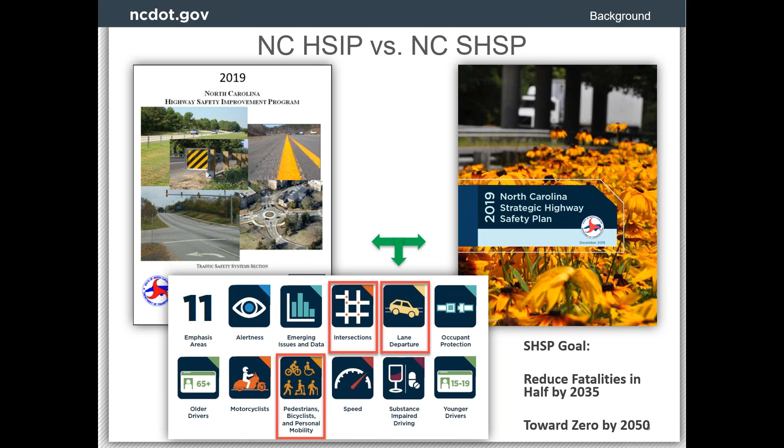In North Carolina, we have 11 emphasis areas with a big focus of the HSIP falling on lane departure, pedestrian safety, and intersections. In 2019, over 30% of fatal crashes in North Carolina were frontal impact crashes, and 2/3 of those occurred in rural areas. When I use the term frontal impact, I'm including a few different crash types, which are predominantly angle and left turning crashes. In 2019, rural frontal impact crashes resulted in over 300 fatalities and 1,100 serious injuries.

These crashes are disproportionately severe. The stats show that about 10% of all rural frontal impact crashes result in serious injuries or fatalities. The statistics demonstrate that our rural intersections need to receive additional focus, and they need to be part of our program in a structured and focused way. We feel that all-way stop, when used strategically, can help move us to better meet our goals for reducing fatal and severe injury crashes in North Carolina.

NCDOT is in the process of treating candidate intersections that have potential to be good all-way stop locations. We are taking a targeted approach and selecting these sites through an all-way stop initiative. In the 2019 HSIP program, over 3,000 intersections were identified through our intersection warrants based on crash history. This includes a diverse group of locations and many sites that would not be considered for an all-way stop due to volumes and site characteristics.

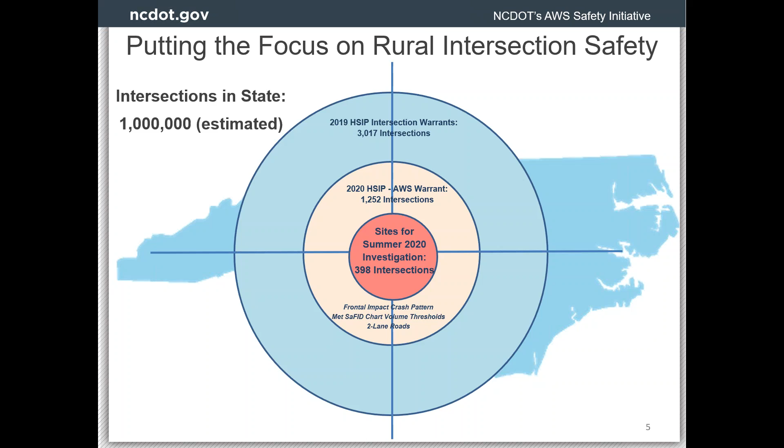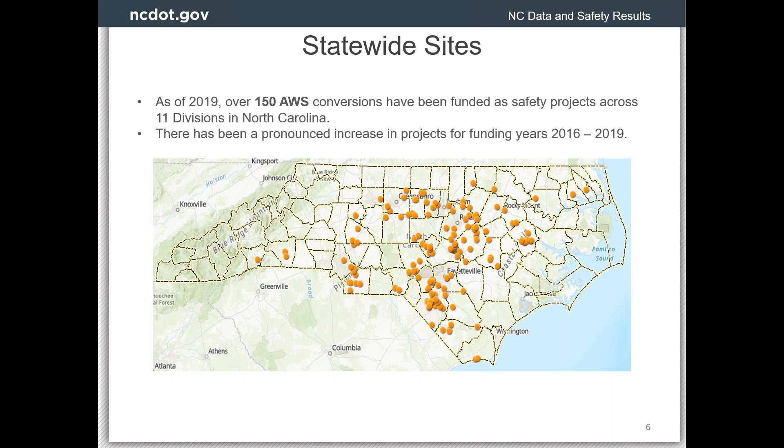This map depicts sites that have been funded as safety projects in North Carolina through 2019, prior to the current safety initiative. There had been over 150 all-way stop projects up to that point. With the ongoing all-way stop initiative and our safety programs, we expect this number to be doubled within the next few years.

10 years ago, we performed a safety study analyzing over 50 intersections in North Carolina converted from two-way stop to all-way stop. This research was authored by Dr. Hummer and me and was published in a research journal. The study included a diverse group of four-leg intersections in a mix of environments and with a range of volumes and approach speeds. The overall results indicated a roughly 70% reduction in total crashes, roughly 80% reduction in injury crashes, and a 75% reduction in frontal impact crashes. The higher speed sites saw an even greater crash reduction than the lower speed sites, which makes sense assuming greater reductions in speeds entering the intersection.

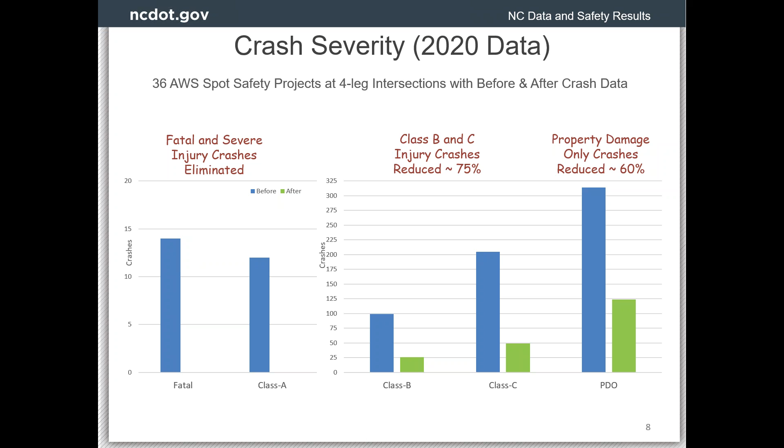Following up on this work, we used a current set of all-way stop projects to analyze the impacts on crash severity. We found fatal and severe injury crashes were eliminated after all-way stop was installed. We found a roughly 75% reduction in Class B and C injury crashes and a 60% reduction in property damage only crashes. This demonstrates the impact that all-way stop has on all severity of crashes, but that its truest strength is reducing the highest level of injuries.

Using the same set of all-way stop sites, we find a staggering 83-to-1 benefit cost ratio. This is due to the relatively low cost with median installation costs of roughly $20,000 per intersection and the previously mentioned elimination of fatal and severe injury crashes for these sites. In the roughly 100 all-way stop intersections I've studied through the 2010 paper and this more recent data set, I've never observed a fatal crash after the all-way stop was installed.

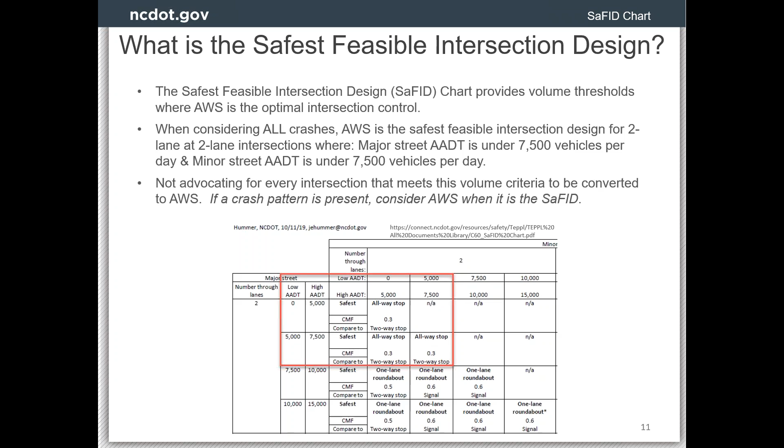Here are some numbers that Dr. Hummer produced to back that up. These are from the Highway Capacity Software and with some assumptions made of what we would expect to find in North Carolina. This is comparing two-way stop control to all-way stop control and provides the average delays in seconds per vehicle in the peak hour of the day.

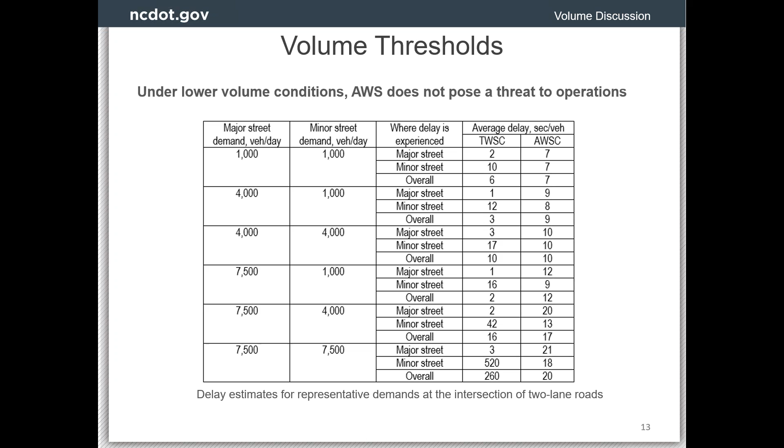If you look down the chart, you can see the pattern is that all-way stop adds a few seconds of delay to the major street on average, reduces delay on the minor street by a few seconds per vehicle on average, and overall the pattern is that all-way stop adds a few seconds per vehicle, but never that much additional delay. At the bottom, there's a case where two-way stop gets over capacity and now the all-way stop operates better. The safety benefits of all-way stop are so good that a few extra seconds of delay should not be enough to stop us from installing the countermeasure where it otherwise fits.

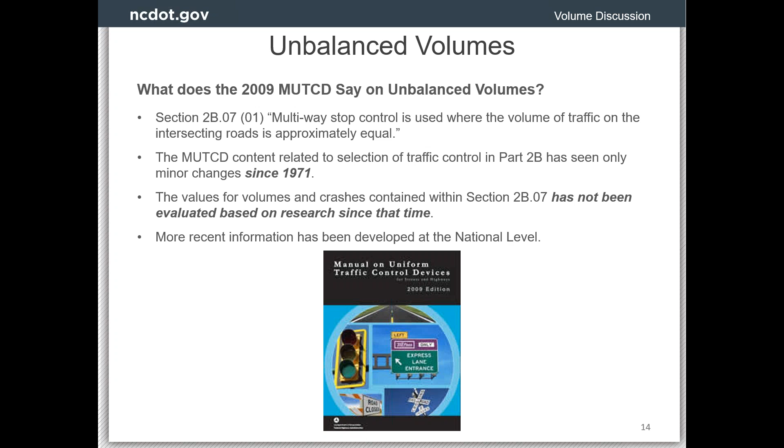I'm going to spend a little bit of time talking about unbalanced volumes and what data is available on the topic. The 2009 MUTCD states that multi-way stop control is used where the volume of traffic on the intersecting roads is approximately equal. The content in this section of the MUTCD has only seen minor changes since 1971. The information in this section is not based on research conducted since that time. We acknowledge the information provided in the current and past editions of the MUTCD in this section has been used for many years, but more recent information has been developed at the national level.

The more recent research is that of NCHRP 03-109, which created proposed MUTCD criteria for determining appropriate traffic control at unsignalized intersections. I served as a panel member on this research, which was completed in 2015. The criteria were developed to be considered for inclusion in the next version of the MUTCD, and the research results have been provided to the National Committee on Uniform Traffic Control Devices for their consideration.

In the all-way stop criteria that was developed, all language pertaining to unbalanced volumes was removed. One document that is referenced in the report is a study that showed all-way stop is no less effective when approach volumes are unbalanced as when they're equal on all approaches. This more current research from the NCHRP study will likely change what is provided in the next version of the MUTCD.

I'm going to share with you some information from North Carolina. We have over 140 all-way stop projects funded by Spot Safety with major and minor road AADT information. When we split the sites by volume share, we find that half of our sites have volumes that are approximately equal. The other half of sites have volumes that would be considered unbalanced. The most unbalanced site in this group had a volume share of 89/11, meaning the minor street volume accounted for 11% based on the AADTs.

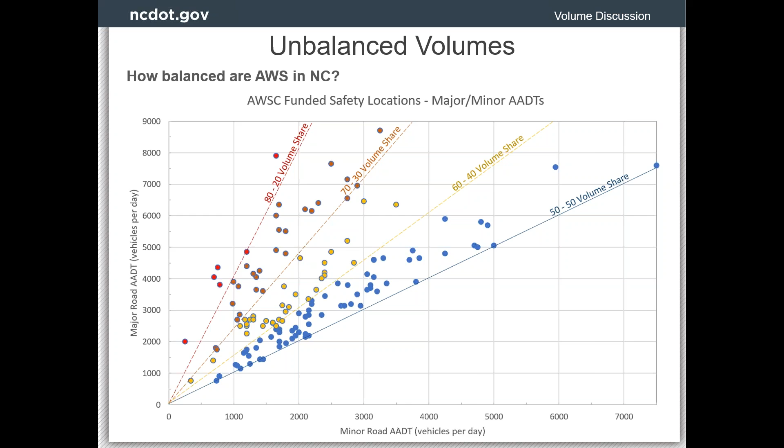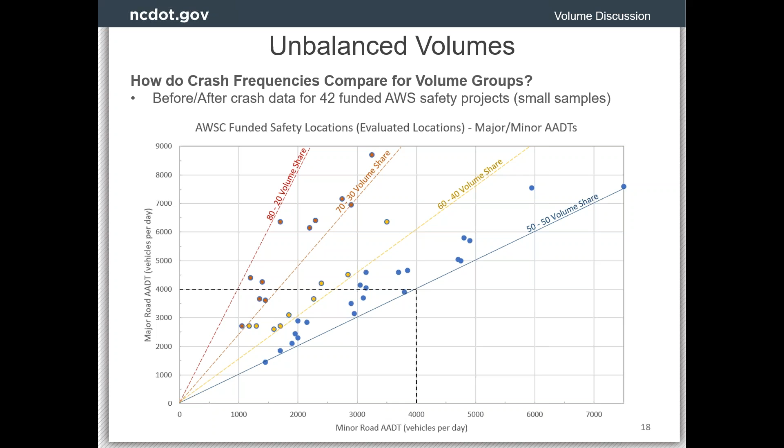This is a subset of sites that have both volume and before and after crash data available. We use this set of sites to compare crash frequencies for 6 different volume bins that break out the sites by the major road volume and volume share. It's a small sample to pull from, but we can extract some helpful information from it.

The next slides I will present briefly cover a few other items we have frequently received questions on related to all-way stop. Presence of trucks should not be a reason to exclude all-way stop as a safety treatment. Locations with a high truck percentage may need a closer inspection. However, all-way stop does not appear to pose a problem for trucks based on crash data.

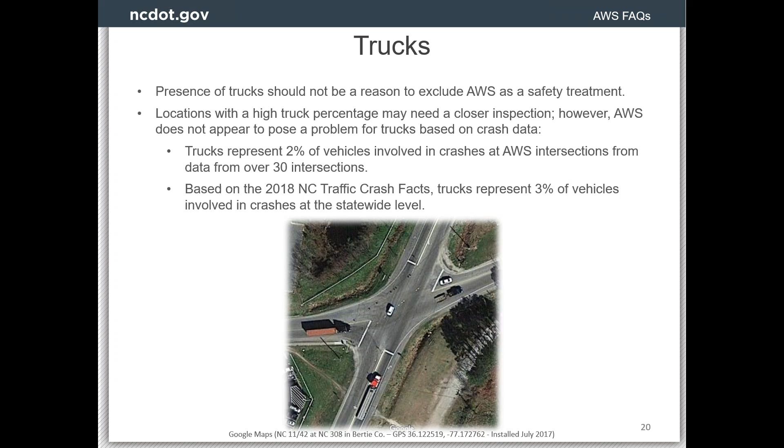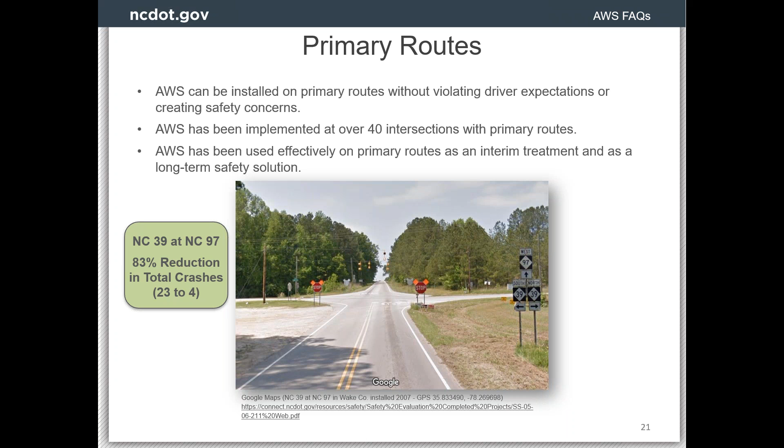All-way stop can be installed on primary routes without violating driver expectations or creating safety concerns. It has been installed at over 40 intersections with primary routes through the Spot Safety Program. This example intersection, which was installed in 2007, showed an 83% reduction in crashes.

As an interim measure, all-way stop can be installed quickly and can control traffic while arrangements are made for a long-term traffic control. This would be where roundabout, mini roundabout, or traffic signal are justified based on intersection volume, but where there's an immediate safety need that can be addressed by the all-way stop.

An example at left, crashes per year were reduced by about 50% when the two-way stop was converted to all-way stop. We also have many locations installed for a long duration of time that are still doing well, with roughly 40 locations installed 5 or more years ago that are still in place. On the right is an example that was installed in 2011 and which saw a 79% reduction in crashes.

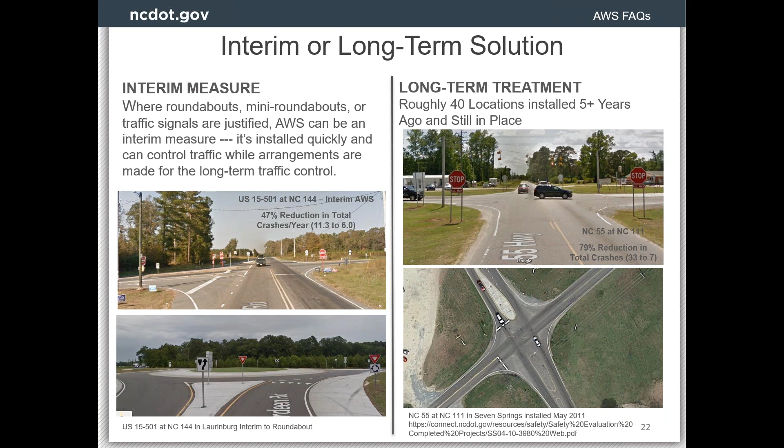The safety of all-way stop at 4-leg intersections is well demonstrated. There's likely great potential for 3-leg intersections. However, limited safety data is currently available. This example 3-leg intersection saw a 69% reduction in crashes when all-way stop was installed.

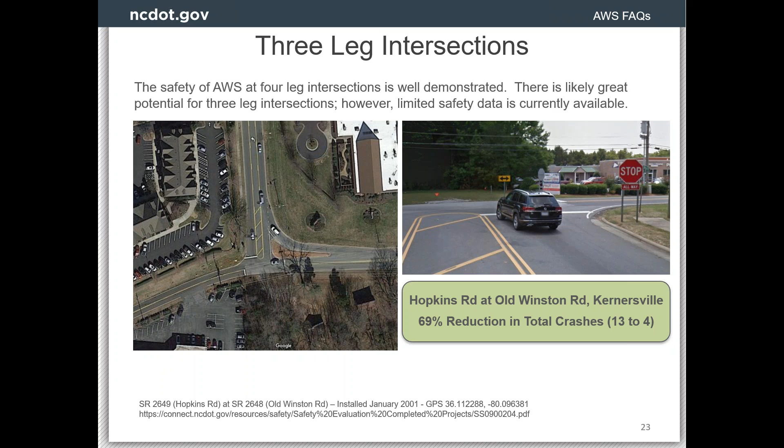The HSIP initiative is focusing mostly on rural intersections. However, I would be remiss if I did not at least briefly touch on pedestrian considerations. In urban locations, the impacts of pedestrians on all-way stop operation need to be considered. Additional study may be needed if pedestrian volumes are high. In locations with heavy pedestrian volumes, there may be conflicts between pedestrians and motor vehicles, and operations may degrade.

However, all-way stop may be a safer option than some other forms of traffic control. More data and research is needed in this area. I found a news article out of Asheville where all-way stop was installed at an urban intersection a few years back as a pedestrian enhancement to make a crossing safer.

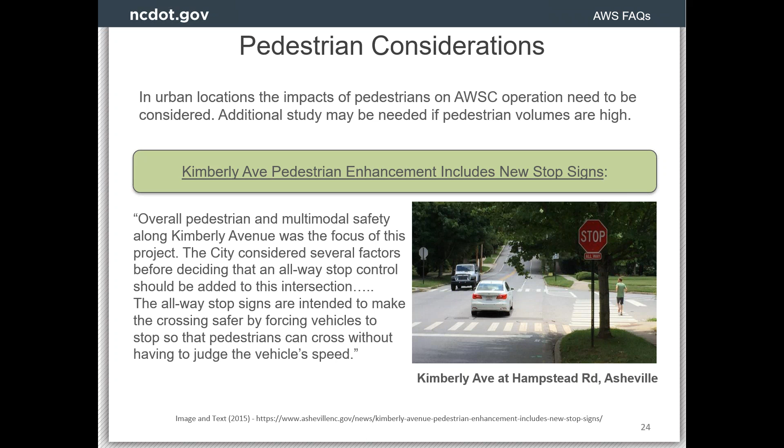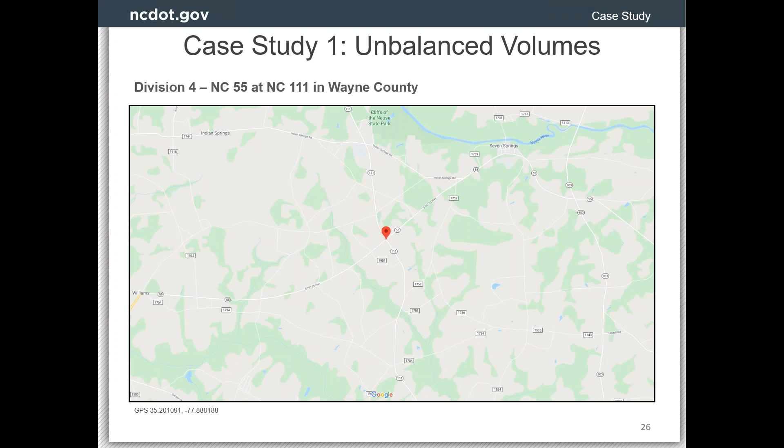Thank you, Carrie. And I have 2 case studies to go over today. Case study number 1 is NC 55 at NC 111. This is a rural intersection in Wayne County. This intersection is located south of Seven Springs, North Carolina, and just south of the Cliffs of the Neuse State Park.

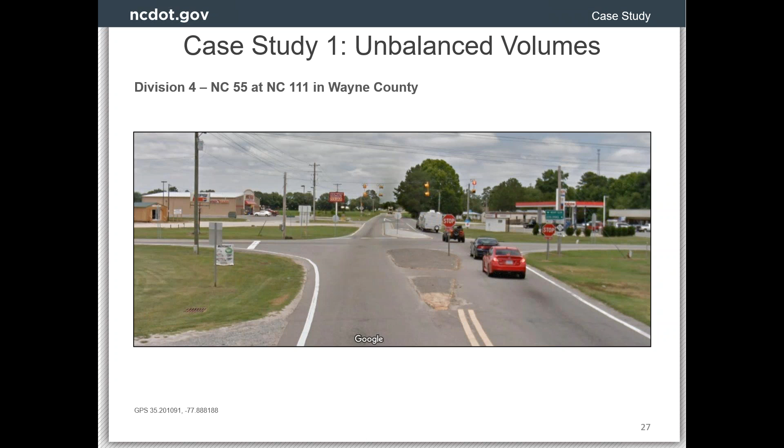This is looking north on NC 111 under current conditions as an all-way stop controlled intersection. There's a good amount of commercial development here, including a gas station, a Family Dollar store, a car lot, and a restaurant. Average daily traffic on NC 55 is 55% of the volume of NC 111 at this location. There's a high percentage of truck traffic. It's interesting to note that when this was under two-way stop control, the stop condition was on NC 111, which is the higher volume road.

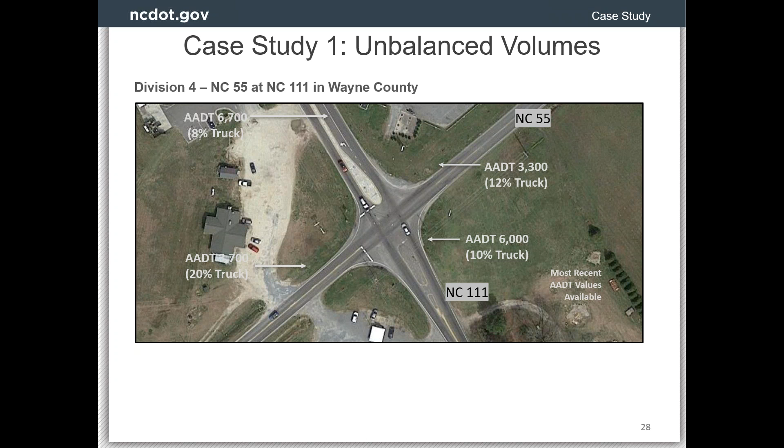This intersection was originally identified by the 2010 Highway Safety Improvement Program. A spot safety project to convert it to all-way stop control was developed and submitted in May of 2010. Modifications included changing the lenses of the existing overhead flasher to red on all approaches, installing dual stop-ahead warning flashers on both approaches of NC 55, supplementing the existing shoulder-mounted stop-ahead warning flashers on NC 111 with identical assemblies on the left shoulder, and widening the shoulders at the intersection.

So the spot safety project was funded and the all-way stop conversion was completed in May 2011. Here's the before and after data representing 3.92 years in both time periods. The installation of the all-way stop resulted in a total crash reduction from 33 to 7 crashes. Total severity was reduced by 69%, and frontal impact crashes were reduced from 31 to 3. Traffic volumes increased by 25% during the study period to over 9,000 total entering vehicles.

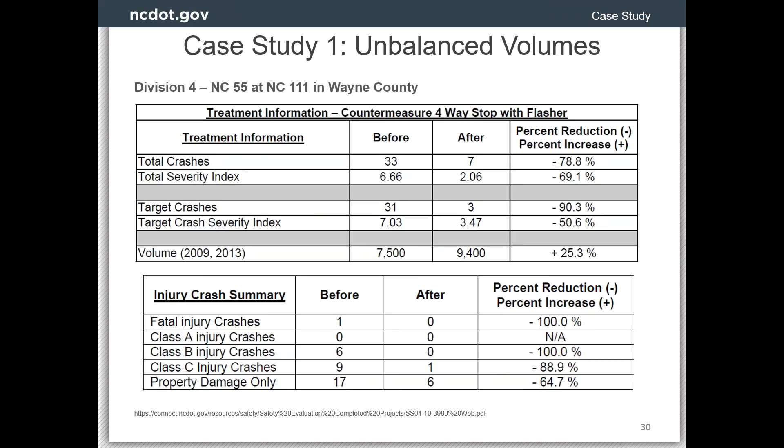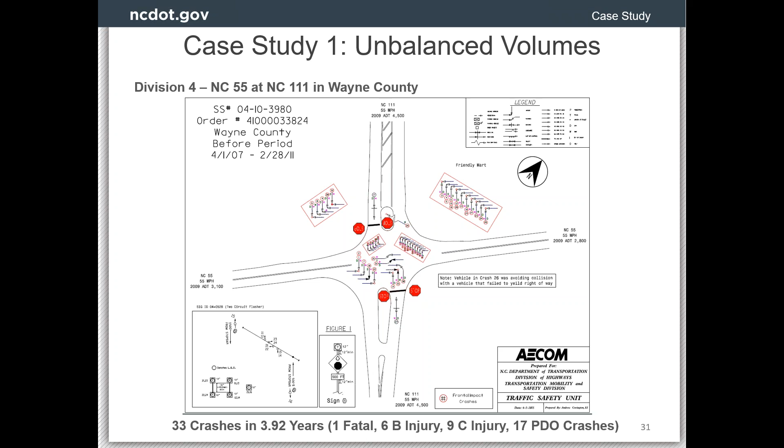And here's the before period collision diagram showing the pattern of angle crashes. The HSIP investigation notes indicate that the primary issue with the angle crashes was failure to yield after stopping. And then here's the after period collision diagram showing this significant reduction in crashes.

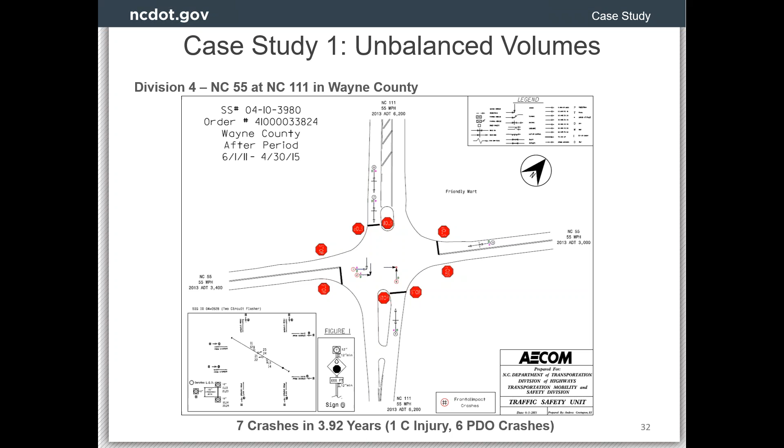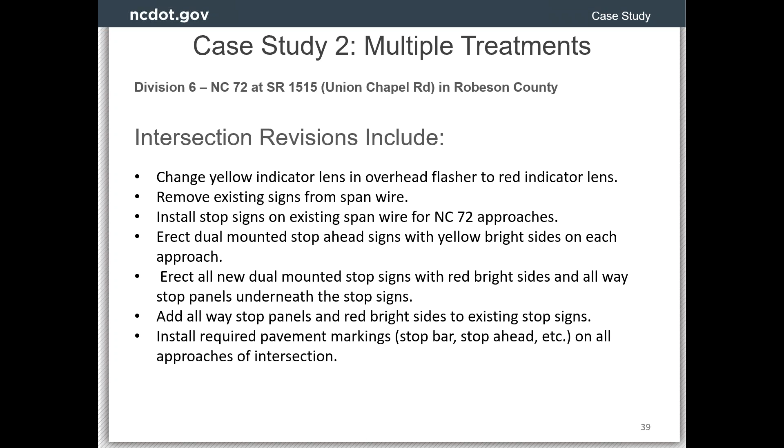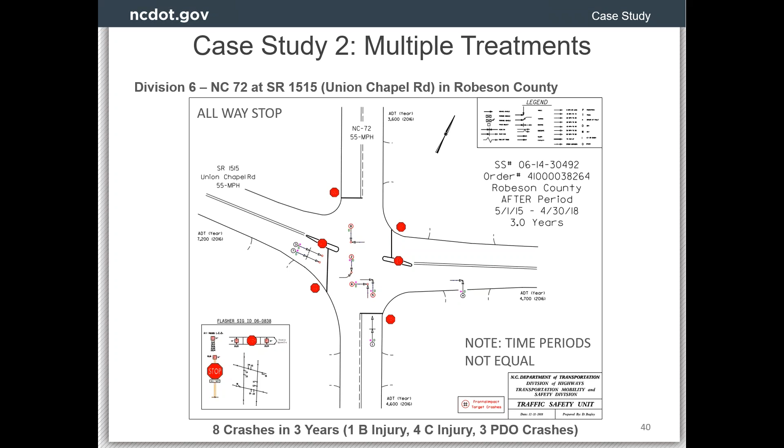And so as a result of the continuing crash pattern, an additional safety project was developed to convert the intersection to all-way stop control, shown here. And that project was completed in March of 2015. So that project converted the overhead flasher to display red on all approaches, added stop signs, stop ahead signs, and new pavement markings. And so here is the crash data for 3 years after the all-way stop conversion. There were 8 total crashes, including 5 injury collisions. And note that there is a difference here in the time period on this slide from the previous slides.

So if we compare the per year crash experience between the two-way stop control, the two-way stop control with actuated flasher, and the all-way stop control, there was only a minor improvement as a result of the flasher project. Comparing the before data to the all-way stop data reveals significantly better safety performance with a reduction in total crashes, severity, and target crashes per year. And one final note on this location, there was concern expressed by the local community regarding the expected operational performance of the all-way stop. Following conversion, the intersection operated very well with only minor queuing of 2 to 3 cars at a time during school hours.

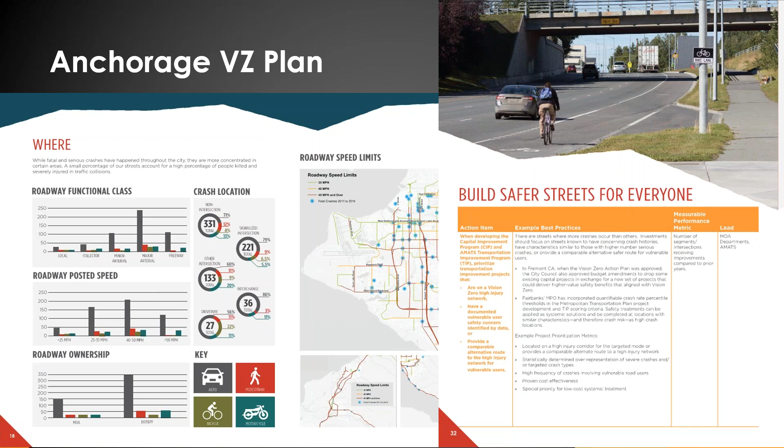So this was a summary we presented last year on the actions of Vision Zero in the first year of implementation. So we created the plan and the action plan, and then it was actually the state health department that secured a CDC grant for 5 years of implementation. Otherwise, it might have sat on the shelf, and I'll get into that a little bit later. So in subsequent years, we've done an annual report and really tried to work on agency buy-in. We had a roadshow presentation to wide audiences, committees and boards throughout the municipality.

We conducted a crossing study on a key arterial and are looking to set a systemic approach there. We did a transit survey for mode choice, as well as a demonstration project, and a couple more next year. However, I can say, this looks good. We pulled together a nice infographic, but Vision Zero is really yet to take hold for Anchorage.

Even in the agencies, there's the usual city versus DOT conflict of priorities, as well as we haven't even had a chance to try broader outreach to the public. So I'm going to use the Anchorage plan and other examples to share lessons learned and key elements of a successful plan, whether or not Anchorage gets there, but we're still working on it.

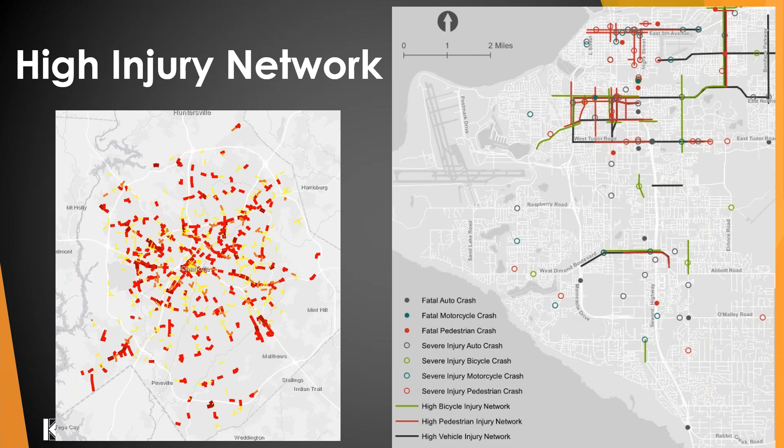A note on key data limitations. The challenge with crash data is it comes from police reports, and in Anchorage, actually about half the crashes are from citizens reporting themselves. And those folks have their own focus and challenges. They aren't necessarily thinking about a systemic review later on. For example, in Anchorage, 65% of our pedestrian crashes did not include pedestrian actions. So we didn't know if they were crossing the street or where or how, for instance. So that's a real barrier to systemic analysis.

To expand on some of this, we used a variety of sources. We used older but more thorough DOT data that was geocoded. We used newer data from the city. We also even used recent media accounts, assuming that any fatal crash or maybe a severe pedestrian or bicycle crash will be in the news. And actually, a local television station was maintaining a crash map for a while. So we incorporated all available data to us.

We also looked at hospital data, and the key element there is our crash data doesn't have demographic information. We wanted to make sure we were capturing that. So we looked at the hospital data. As a result, we discovered that, for instance, for pedestrians, Native Alaskans were overrepresented, and that was a key area we focused in on going forward.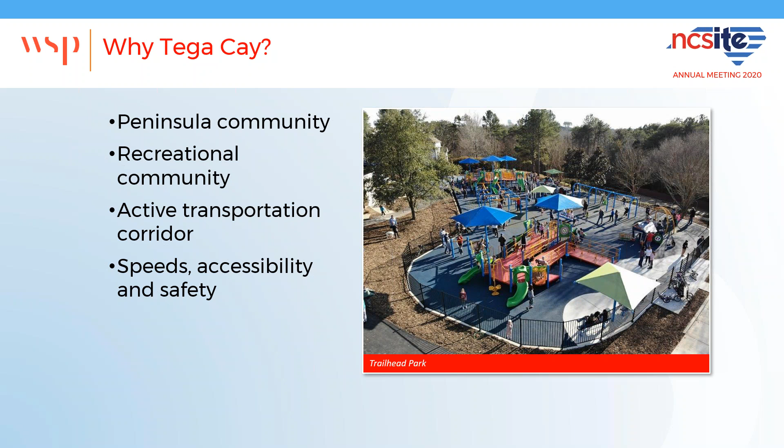Next slide, please, Bradley. Now, one of the unique things about the study area there, and you see up on screen, is Tega Cay is a peninsula community. You've got one major road in and one way out, and it's a very dynamic corridor as such. So you've got development all along Tega Cay Drive, both sides. Everyone wants that great lake shot view. And as you might imagine, when people are getting up in the morning or coming home in the evening, they're eager to get back home. And that obviously has implications for the pedestrian environment all along that corridor.

Next slide, please, Bradley. Now, this kind of fills in the picture a little bit. Again, this is an area that's based around the water. It's made a prior commitment to having a significant bicycle and pedestrian network, and it's fairly well developed. But again, one of the things we're noticing is that speed levels are increasing. More reports of close calls are being voiced by area residents, and there's a desire to make sure that a lot of the gains that have been realized by these prior investments in infrastructure are not lost as the growth pattern continues. Next slide, please.

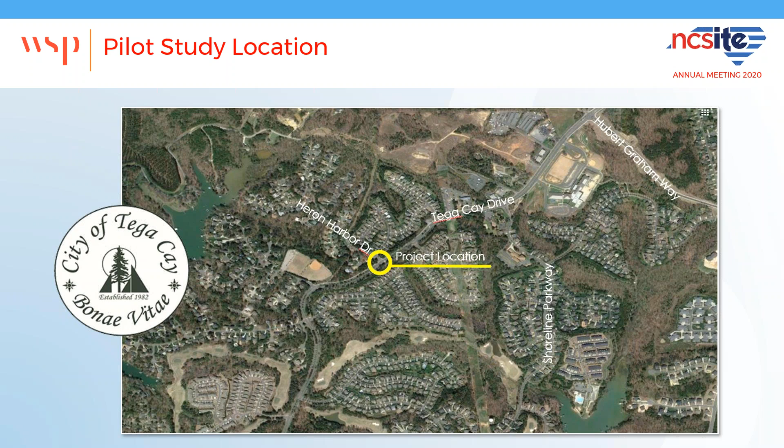Now, as we kind of zoom in there on Tega Cay, we wanted to highlight Heron Harbor Drive. This is kind of a key point that came out of the analysis where we want to try what I'll call the non-traditional placement of pedestrian improvements. And so it's one of the things I want you to listen for as Bradley goes through the data is this tension between traditional improvement strategies and innovative improvement strategies, and a shift that's occurring in the types of decisions that we're making locally and the basis on which we arrive at those decisions.

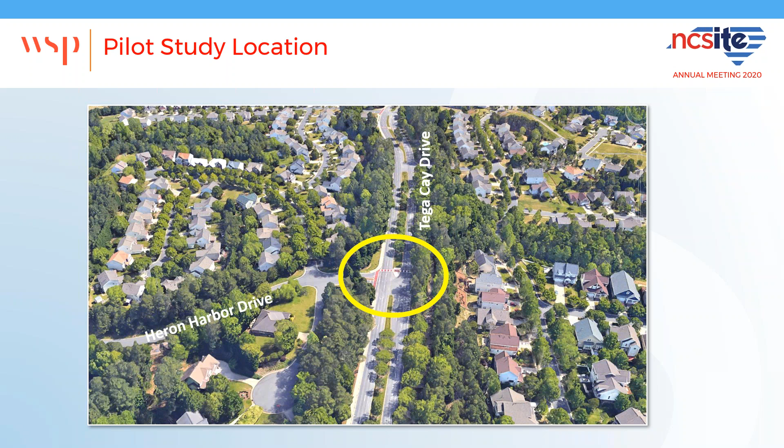Because in many cases, getting the go-ahead requires having documentation that will support such an action, and making sure that our partners with the state DOT are comfortable with planning agencies taking a more proactive approach because of the dynamic growth and changing environment within this planning area. One more slide, please, Bradley. Now, I want to just give you a snapshot of what we're talking about here when we talk about these in-road warning lights. We've already got well-marked crosswalks. We have got a lot of signage out there, but we've got some inattentive drivers, or drivers who might push the boundaries a little bit on their way home. And so we wanted to find a way to bring more control to the experience in the area.

We also wanted to recognize that it's not just driver behavior that's causing some increased concerns, but also the physical layout. This roadway meanders all the way down from the major urban portion out to the end of the peninsula. And there are lots of trees on both sides of the road. And so one's visibility diminishes and changes. There's also considerable grade changes along the roadway. So you can imagine those who are moving quickly and those other residents who want to get out for a walk with family, getting home from a place of recreation, and trying to bring those two things together where we can ultimately have a safe outcome for everyone.

So again, wanted to give you a quick snapshot of the planning context. And what I'd like to do is turn it over now to Bradley and have him walk you through the specific engineering analysis and the study that was completed in support of this effort.

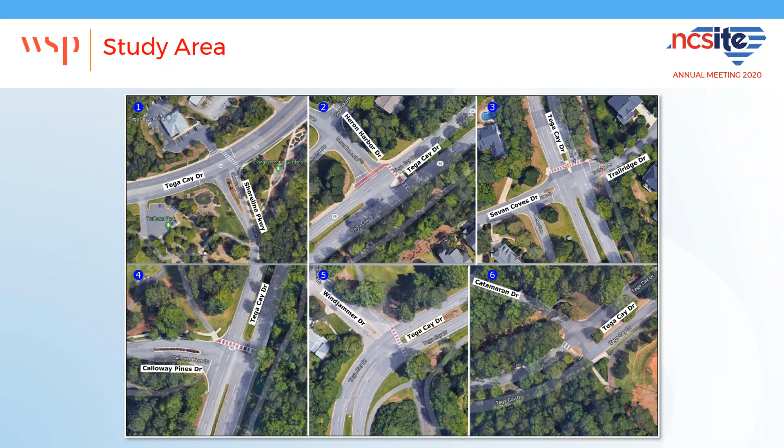Thank you, David. David gave a great overview of the area, the unique conditions, why this area is being looked at in more detail, even though there are some existing pedestrian measures, crosswalk, signing, shared use paths along the corridor. On this slide, I really want to highlight the 6 focused intersection locations where we were looking at specific pedestrian safety enhancements and crossing treatments along the corridor. And I'll get into each of these in more detail on the following slides. So to give an overview of how we started this study and this process was to understand the existing conditions.

And as part of that, we looked at the pedestrian infrastructure, the traffic counts in the area, field observations. We took counts all week long, as well as video observations. We explored the sight distance at these locations, crash analysis, collecting available crash history, as well as looking at vehicular speed.

Also, as David mentioned, there is topography out here. The roads are not particularly winding, but they do curve, and there also is a grade as you go down to the waterfront. So some of these locations had approach grades up to 8%, which can be somewhat significant when you have 7 crosswalks along this corridor in the study area along the major Tega Cay Drive, as well as 8 minor street crosswalks along the side street.

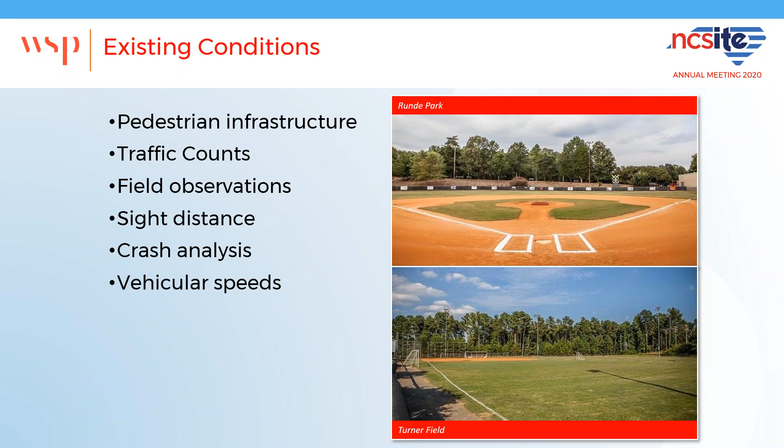And there are crosswalks along the corridor, as mentioned, the major street, 7 total. One of the unique aspects of this study as well is there's golf courses all throughout this community, so there are 3 golf course crossings as well. And on the southern end of the corridor, there are some communities that do not have sidewalk access and do not have crossing access, so those were looked at as well. Lighting is along the corridor, but as we'll get into some of the finer details, it's the street and roadway lighting, but it's not necessarily helping in all conditions with illuminating pedestrian crossings.

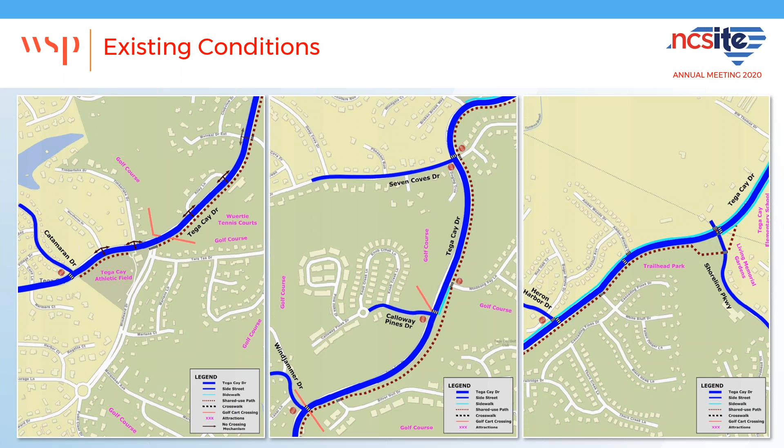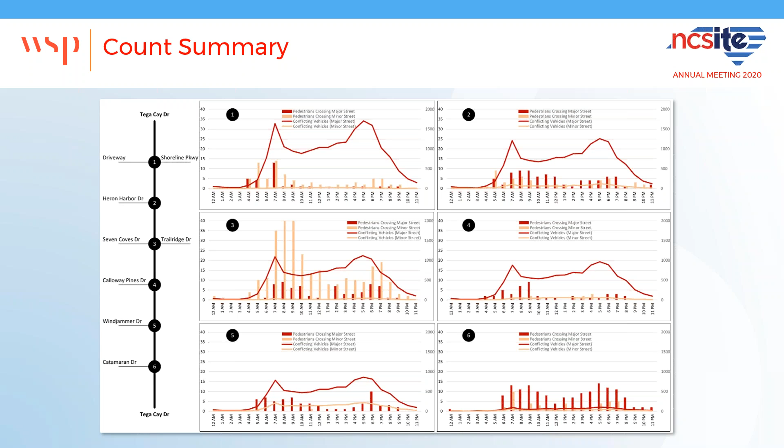A quick snapshot of the crash analysis revealed a few things. One is that there's 29 crashes over a 2-year period along this corridor. Only one was a pedestrian crash, and fortunately there were 0 fatalities. But 12 of the 29 had contributing factors of distracted driving. And that's important as we move into the next slide, which showed that when we looked at the vehicular speeds along the corridor, the concerning thing is at the northern end of the corridor, and throughout most of the corridor, except at the very southern tip, it's 35-mile-per-hour posting. This is a 4-lane median divided facility for most of the corridor. It does transition down to a 3-lane divided and a 2-lane roadway at the very southern tip.

But we know, through Vision Zero and injury types, that as we get above that 40-mile-per-hour threshold, any pedestrian or bicycle crash has a much higher likelihood of being a fatality. And with the number of crosswalks, the amount of pedestrian and bicycle traffic, along with the different parks and communities immediately adjacent to the corridor, these high speeds have a very strong likelihood of creating high severity incidents in the future. And so we really wanted to take that to heart in this analysis and look at pedestrian measures that could help reduce serious injury in the future.

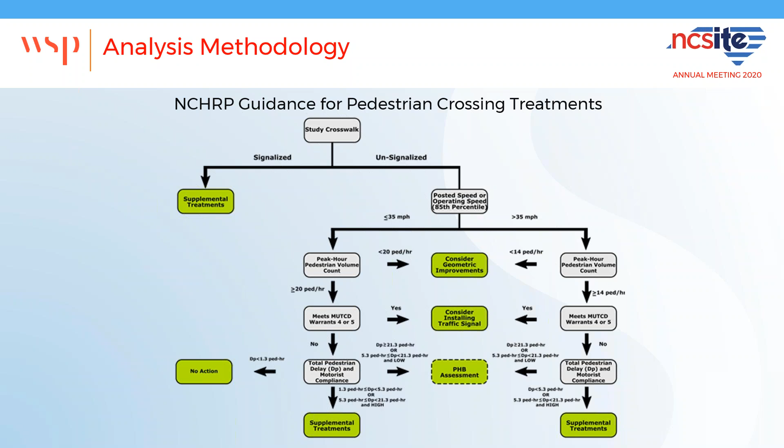So now we're going to transition into the 6 locations and talk about those for a few minutes. This first location is at the northern end of the corridor at the only signalized location in our study area, and it had the highest volumes along Tega Cay, as well as there is a school in the far right, kind of northeast quadrant, just off the page here. And it also had some of the highest pedestrian crossings as well as bicycle volumes, because children are trying to get to and from school in this area, as well as a park being in the southeast quadrant on the lower part of the screen.

So our recommendations here were fairly limited, but they did include installing a signal ahead for the northbound traffic, as well as installing a do not block intersection, which we experienced some queuing in the morning for the traffic volumes either going to the school or just in general trying to get off of the peninsula. We also said consider implementing LPIs or leading pedestrian intervals at this location.

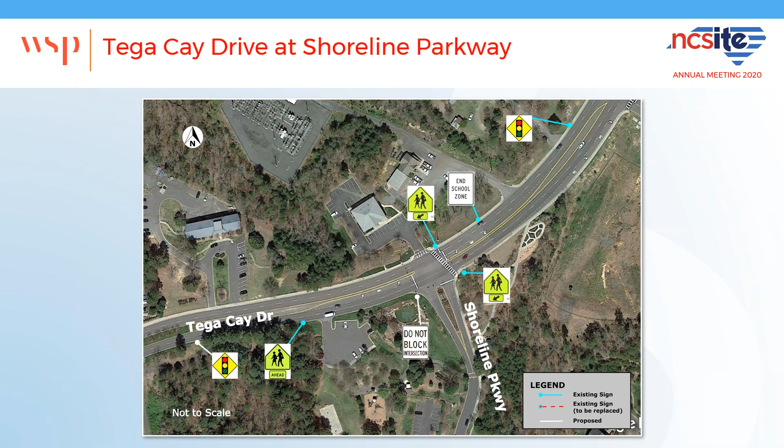So as we move a little bit more south along the corridor, our next one at Heron Harbor Drive, a few characteristics along this location is we are seeing operating speeds around 40 to 43 miles per hour. The pedestrian volumes are in that 14, 15 range, as well as there's some bicycle volumes, and some golf carts are minimal, but still 4 to 5 per hour. And there's some lighting that does exist. However, it's maybe not exactly adequate or where we would want it to be for illuminating both the northbound and southbound pedestrian movement.

So we did include recommendations for providing an advance yield line with yield here to pedestrians. Those are shown in the white lines, the white arrows, and then also kind of the shark's teeth going across each of the directions here, north and south. And then this was kind of where we had the either or option for 3 of these locations, which was to either evaluate and improve the lighting at the crosswalks or consider in-roadway lighting with pedestrian detection. And so this, along with 2 other locations, included those types of recommendations.

One of the keys that kind of led us through these different locations on the left-hand side of the screen is this flow chart. Looking at federal highway guidelines, volumes, classifications of the roadway type, and then going through the flow chart. How much pedestrian volume did we have? What were the speeds? What are our options based on delay, which pedestrian delay was minimal on the corridor, but how does that help get us to solutions?

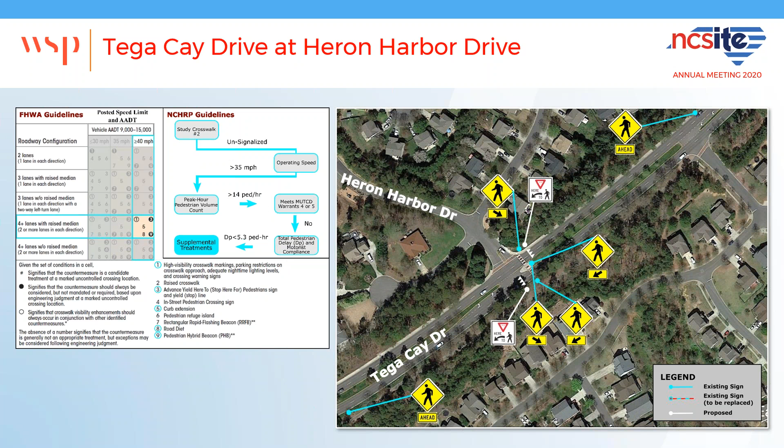So at Seven Coves Drive and Trailridge, the 3rd location down the corridor, again, we were seeing a slight reduction in volume down to 12,000 vehicles per day, but still seeing the 43 mile per hour speed. Here is where we started to see it, like we did at a few other locations, where landscaping and the vegetation were causing some sight distance issues.

So at 3 locations, we did recommend to trim or scale back the vegetation to increase or enhance the sight distance, as well as removing and or replacing some of the signage, which could maybe be a little better placed for pedestrian crossing locations. And then again, here we recommended advanced yield lines with yield here to pedestrians, and then the either or option of increasing or enhancing the pedestrian lighting, or considering in-roadway warning lights.

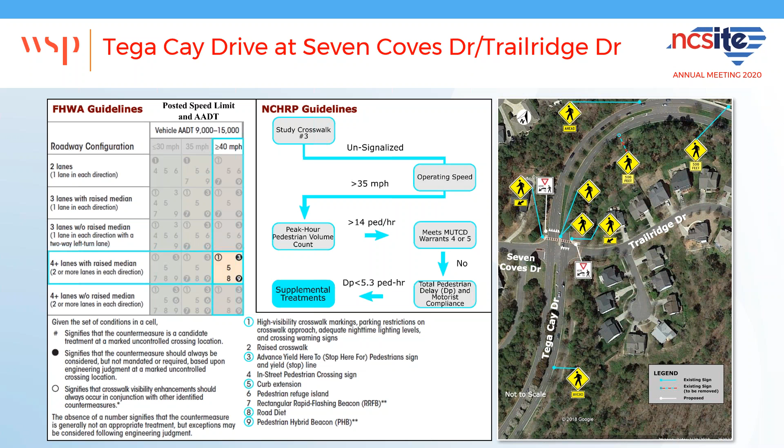Our 4th location, Calloway Pines Drive, this is where it started to shift a little bit from where the intersection fell. This was because we ended up with still greater than 35 miles per hour, but our pedestrian movements per hour were less than 14. So it really put us in the considering geometric improvements category. And here we were looking at improving either the lighting conditions or including the advanced yield lines with yield here to pedestrian signs.

So you can see, we took an approach of it doesn't always have to be something super innovative, but let's look at some low-cost measures that can improve safety, enhance visibility for pedestrians, or look at something that may be a little more innovative, such as the in-roadway lighting.

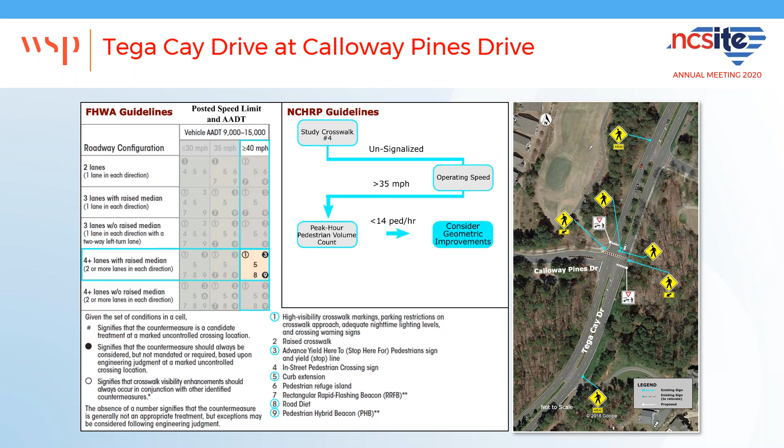And with Windjammer, again, we're starting to see a drop in ADT, but we're still slightly above 9,000 vehicles per day. And here we were seeing the peak hour pedestrian plus the bikes being just over that 14 peds per hour threshold. So here again, we were recommending to include the yield lines with yield here to pedestrian signs. And then it's, again, the in-roadway lighting or improving the lighting at the crosswalk. This one also had some visibility distance issues with vegetation, so we're also recommending to scale some of that back.

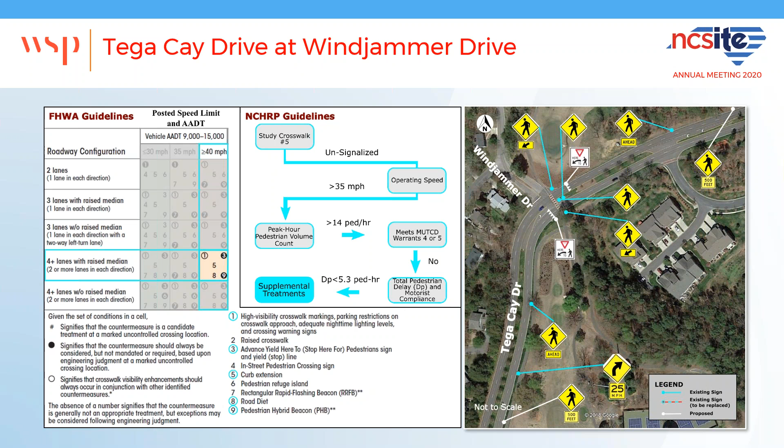And then the final location at the southern end of our corridor was at Catamaran. Walking through this one, we had transitioned away from a 4-lane divided to a 3-lane with median on one side and then a 2-lane undivided on the other. We recommended restriping the crosswalk with high visibility paint because it was worn out, and it would improve the visibility for pedestrians crossing and for vehicular traffic. And we wanted to relocate a few signs that weren't necessarily in the right location.

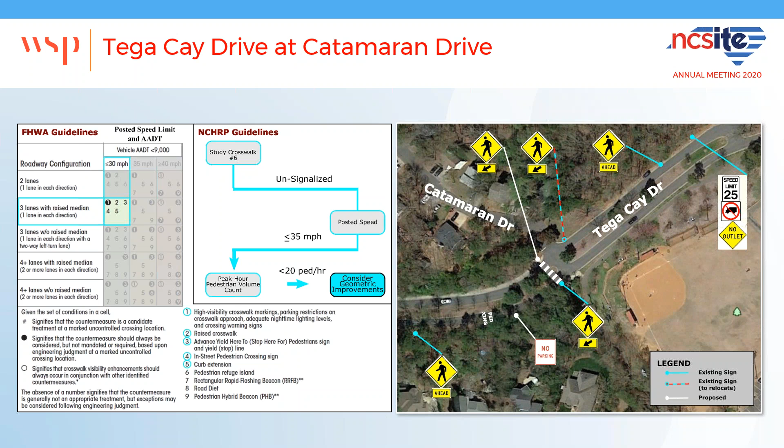And then there were some issues with parking. So going back to how the community uses this with the baseball fields, there was on-street parking that was occurring, which was creating some sight distance issues for vehicles and pedestrians crossing. So we recommended putting in some no parking signage to hopefully alleviate any conflicts moving forward. Also including some ped crossing pavement markings to let the driver know that there are more peds crossing at this location.

So to wrap up some of our recommendations, we did have a few additional ones along the corridor. One was at the crosswalk on Shoreline Parkway, and going back to the very northern end of our study, there's a shared use path that runs along the entirety of the eastern corridor, and it crosses over to get to the school on Shoreline Drive. And so we recommended some supplemental signage to enhance that shared use crosswalk that goes to and from the school.

We also included some recommendations for a mid-block crossing on Tega Cay, where there weren't any for a few of the communities that were in the southern end of the corridor, as well as potentially considering some increase in sidewalk connectivity for those respective communities.

And then last but not least, the pilot study location. We ended up falling at Tega Cay and Heron Harbor Drive for recommending the pilot study location. And this was for a couple of reasons. It was in a location where we were not concerned about the sight distance. Also, it seemed to fit best within the corridor from a grade perspective from the windy roads. And at the end of the day, it just seemed like this was, I won't say safest, but the most appropriate to test a new location like this.

And so I guess the question may be, why consider this type of treatment anyways? And as David mentioned earlier, we really wanted to consider the community feedback, the potential close calls, as well as coordination with NCDOT to look at some proactive measures that we felt could not only enhance this community and safety for the pedestrians, but help NCDOT and even planning for transportation improvements in the future when it comes to supporting safety initiatives and having a way to help quantify the benefits of these. So with this location, we would be looking at doing a before and after study.

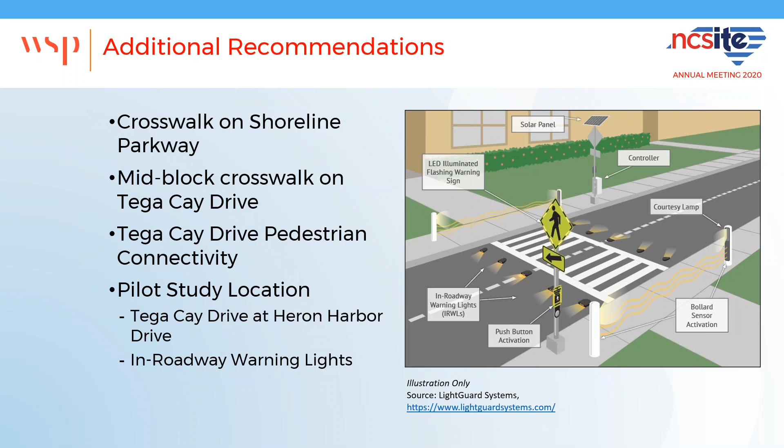And depending on the success of that before and after study, either looking at expanding in-roadway lighting along this corridor or looking at other locations as appropriate across the state. And with that, I will turn it back over to David.

All right, Bradley. Just wanted to emphasize a couple of points here. When you're making planning decisions for an area that's really changing in real time, it requires a willingness to go out there and try things that at first glance are innovative. They're things that our partners at state DOTs may not be inherently comfortable with. And I'd certainly like to extend a thanks to NCDOT to be willing to look at this option seriously.

To give you a quick point of reference, the only other place until we did this where this was endorsed by NCDOT was down in Charleston. You had much higher pedestrian activity levels, overall volume levels, and accident levels. And we said we'd like to take that kind of a treatment that's generally viewed as appropriate in another place, and we'd like to consider it here where the volumes are lower, but we've got a physical layout where it might be supportive. And they came back and they were willing to provide their support conditioned on a comprehensive study and a pilot project approach with the understanding that there would be that follow-up study.

And we certainly understand and respect that, because we know that it's not just in the city of Tega Cay, that if it shows itself to be valuable, there will be other jurisdictions that will seek this. And we would be setting a precedent. And so it's therefore understandable that when it comes to safety planning, where I think people want to be proactive, for the DOT to effectively manage this and have some reasonable standards for its implementation, we needed to go ahead and pursue this approach. And so far it's worked well, and we will continue to look for those after effect outcomes in the months ahead. With that, I'll go ahead and stop and see if we can answer any questions that you might have.